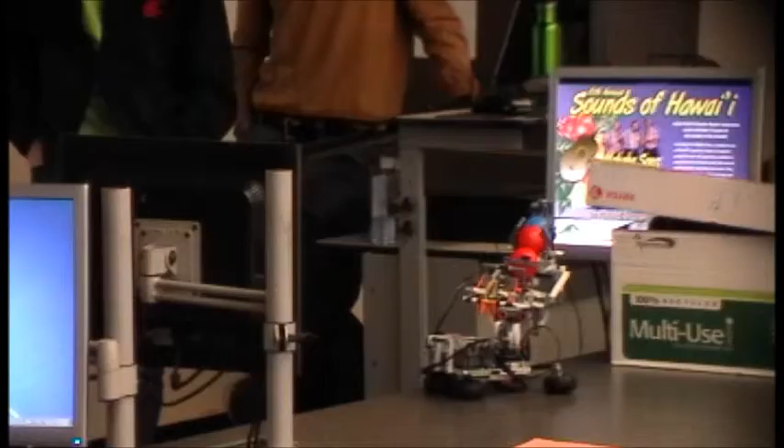Our general design for the barrel includes a seat for the ball, which pulls back, connected to two rubber bands. We also have two sets of railings, one motor that pulls back the seat, and a touch sensor—when the seat gets pushed back, the ball falls into it and it shoots.

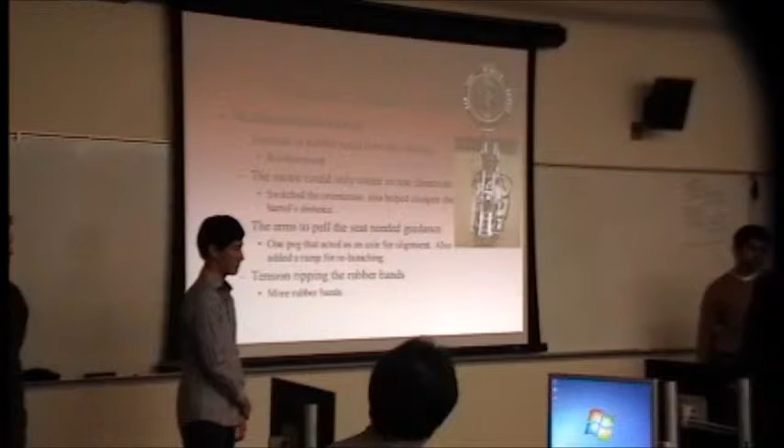When the rubber band was getting pulled back, it was bending these parts, so we reinforced them with extra rails on the side. We also flipped the motor around so we could have a longer barrel for longer shooting distance. So the arm can get guidance, we added one small peg attached to the side so they wouldn't go anywhere.

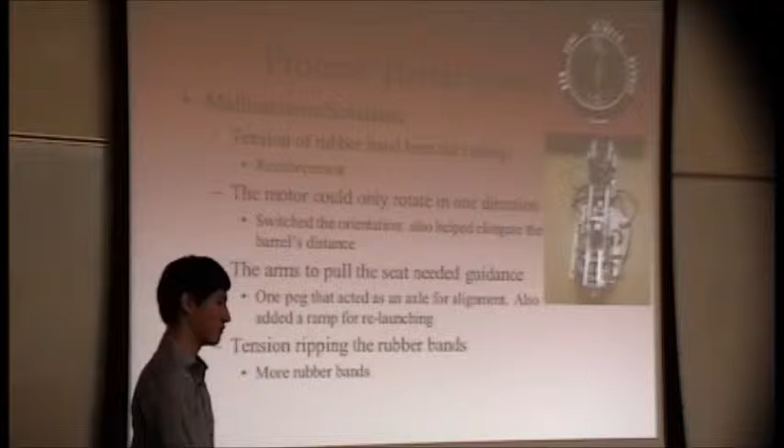We then added more rubber bands to stabilize it. We had difficulty integrating the reloading chamber here on the side, or rather on the top.

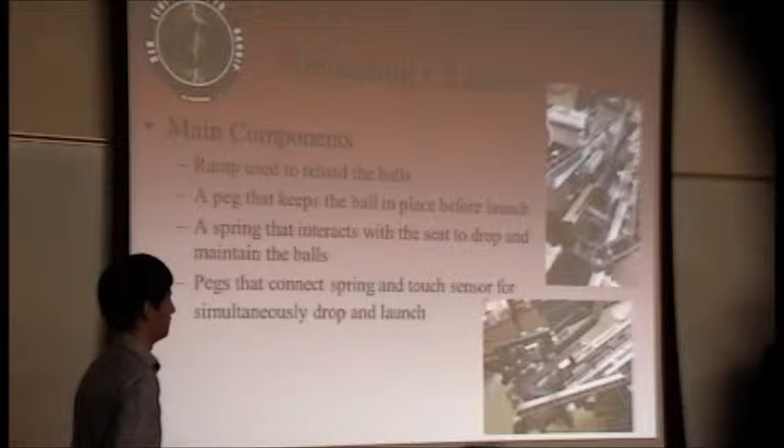What we came up with was a ramp system here that gravity-feeds the balls in. There's also a peg back here that keeps the ball from coming back, because when this rail comes back it actually pushes the ball up, causing a problem where it would push it back and wouldn't fall into place.

There's actually a spring in here. As this sled comes back, it comes in contact with this spring, and it pushes back and lets the ball drop into place, then pushes forward again to keep another ball from falling in. There's a picture on the slide, right here.

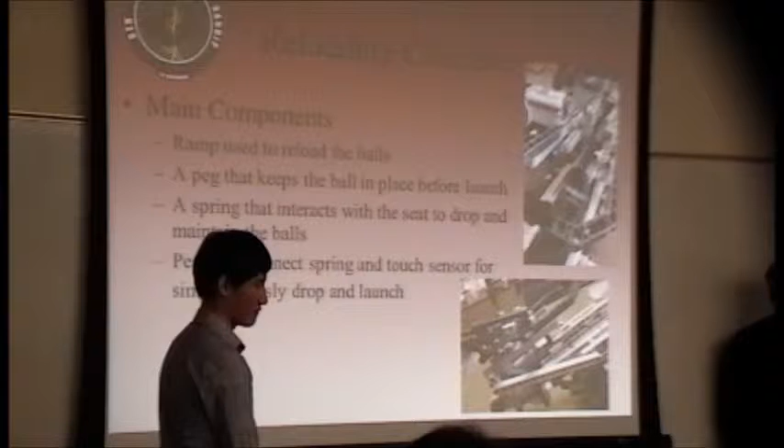We added this because it would sway back and forth. Every time it would come back in contact with the spring, we added a peg connected to the touch sensor to keep it all in line.

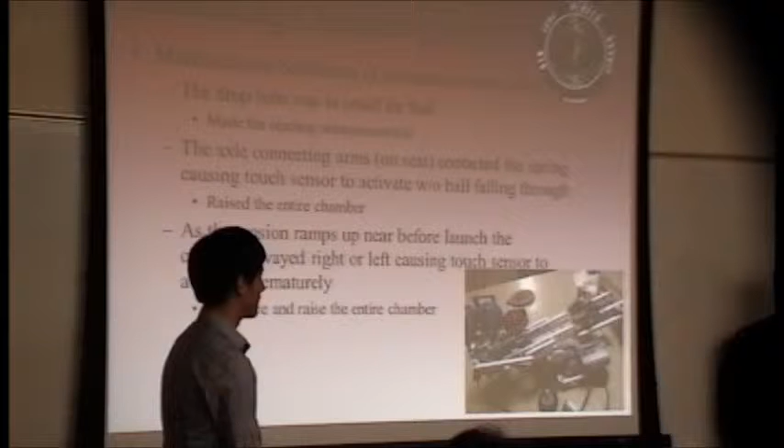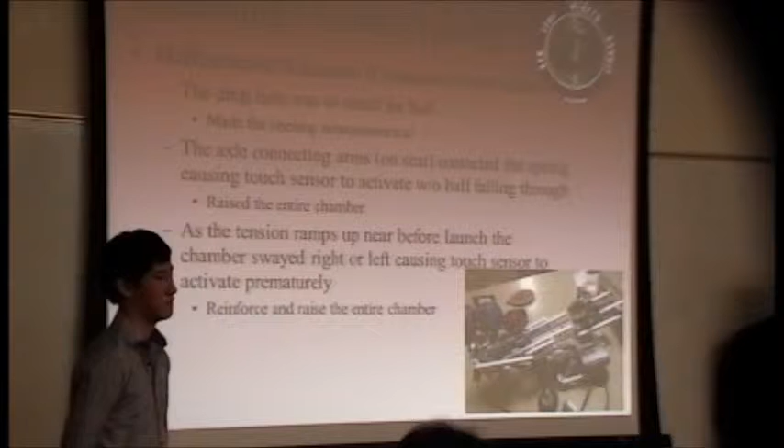Some of the malfunctions we had: sometimes the ball would either not fall in or it was too tight up here. One of the struggles early on was that it wouldn't fall in, but as the motor kept pulling it back, it would finally release and either fall off to the side or shoot incorrectly.

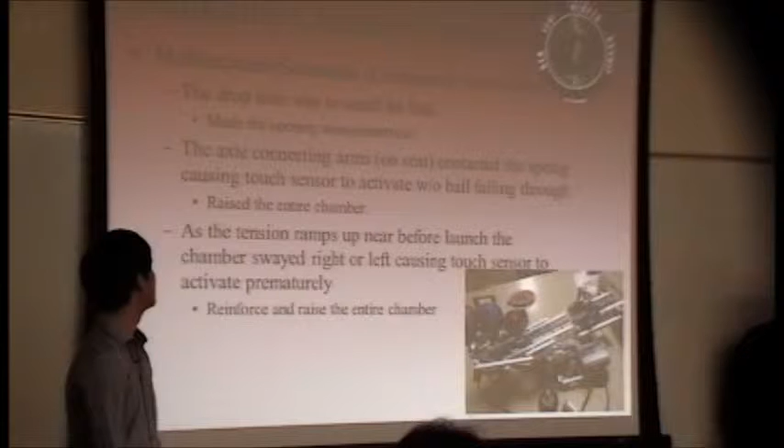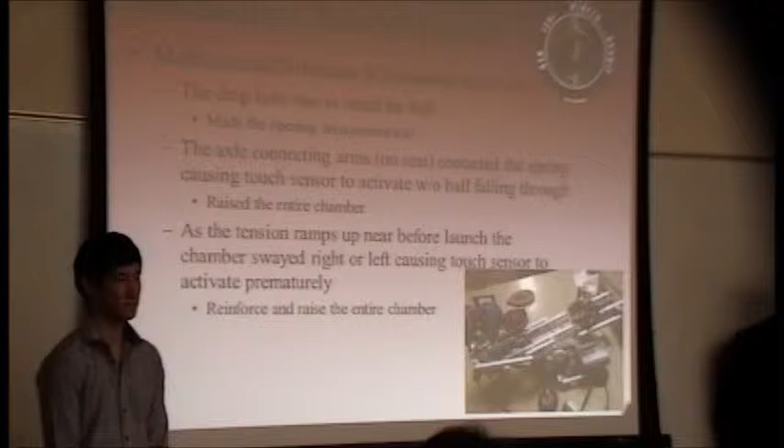Another issue was that sometimes it would shoot prematurely, with the axle continuing to go back without touching the touch sensor to stop it, which would tear this whole thing off.

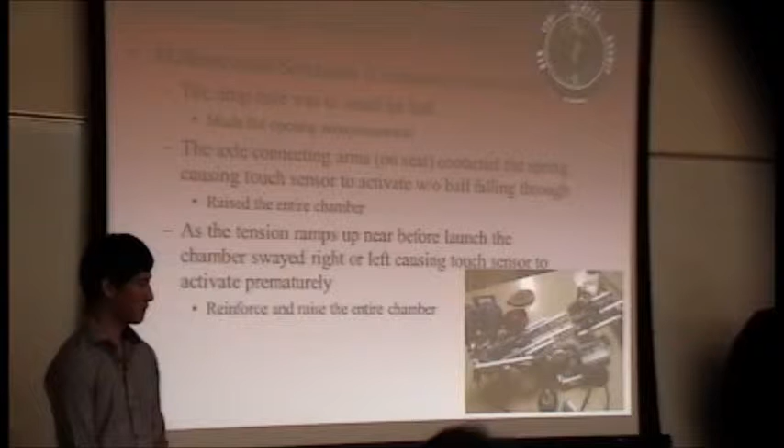Like I said before, this would sway back inside, so we added these long arms to keep it in line. That way it wasn't coming off track and everything stayed straight so it could feed properly.

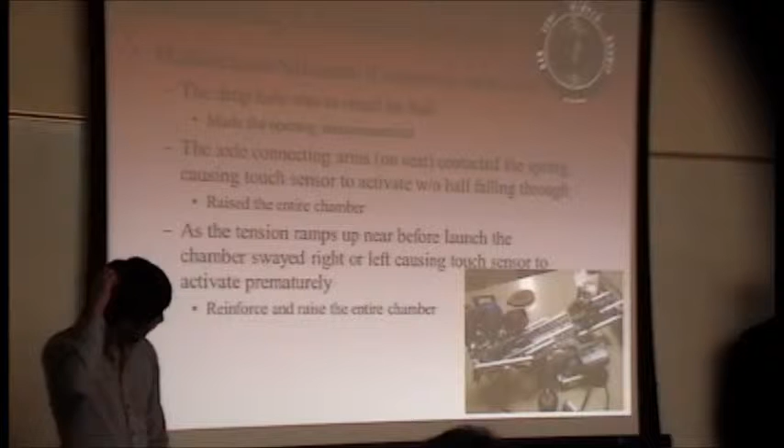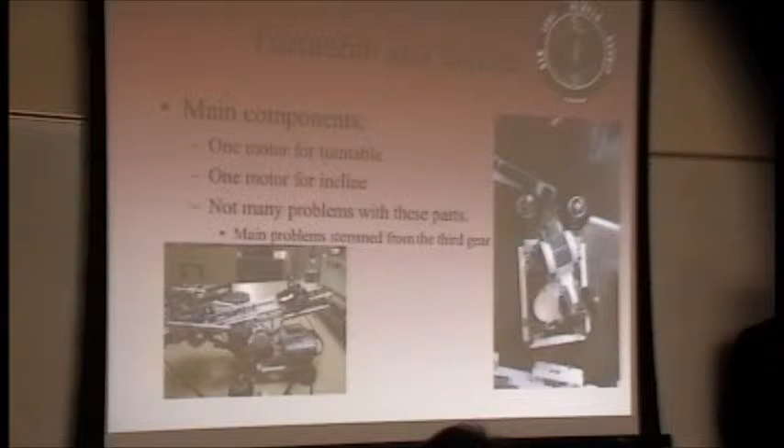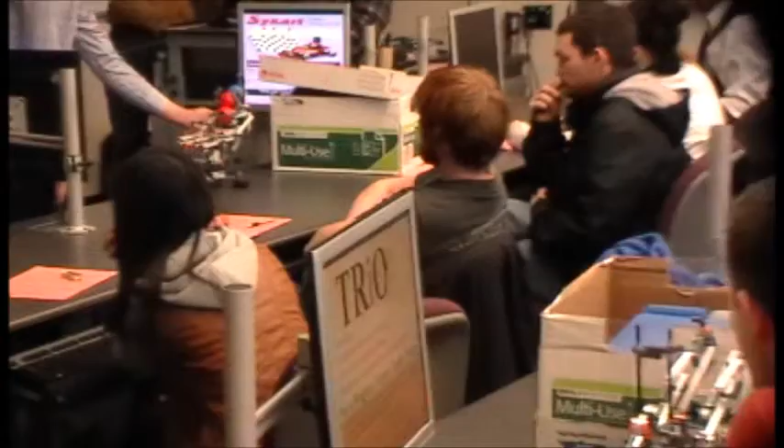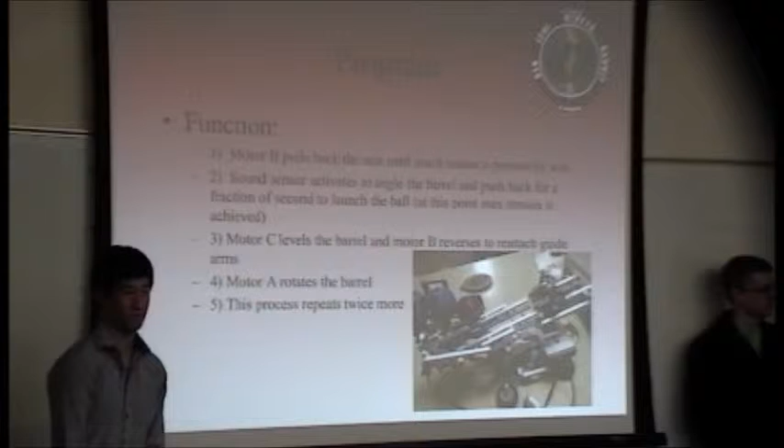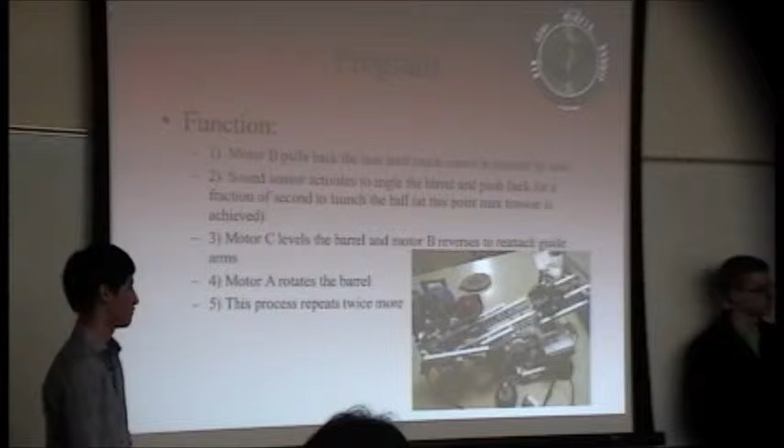Our program is pretty basic. We used a touch sensor and a sound sensor. It starts with motor B, the one in the very back connected to the two strings. That pulls back the seat, which keeps going back until it comes in contact with the peg connected to the touch sensor. Once that activates, it stops. The program waits for us to make a sound, then it goes back for a fraction of a second.

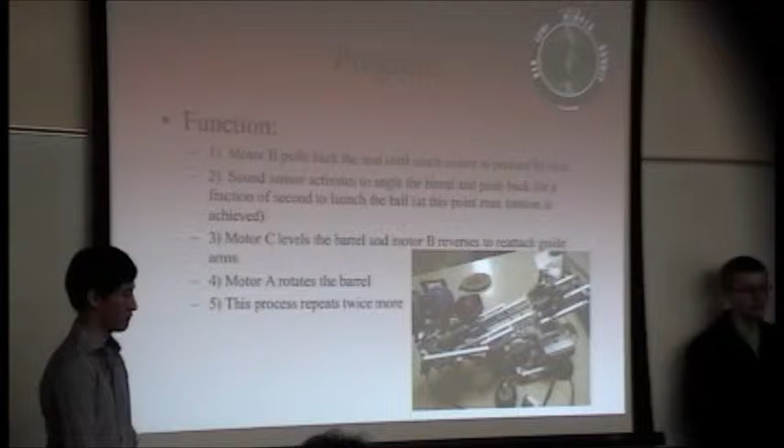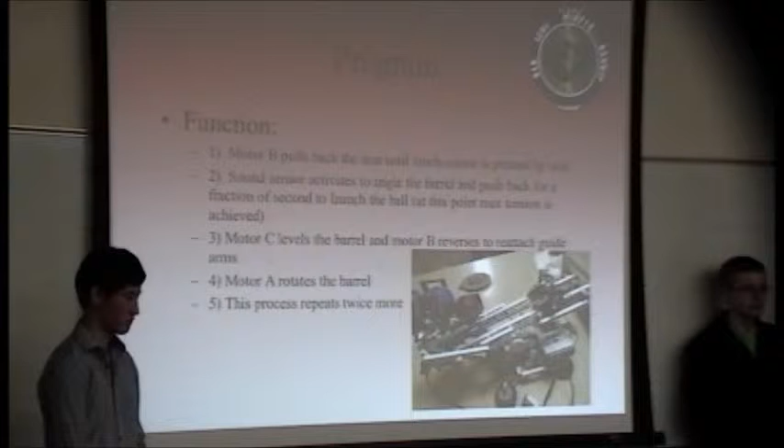So now it's up against the wall, and the two side arms right here will just pop off, releasing with the force of the rubber bands. Once that happens, it levels again. That's motor C, and it'll rotate using the right bottom motor, kind of hard to see, and that repeats twice more.

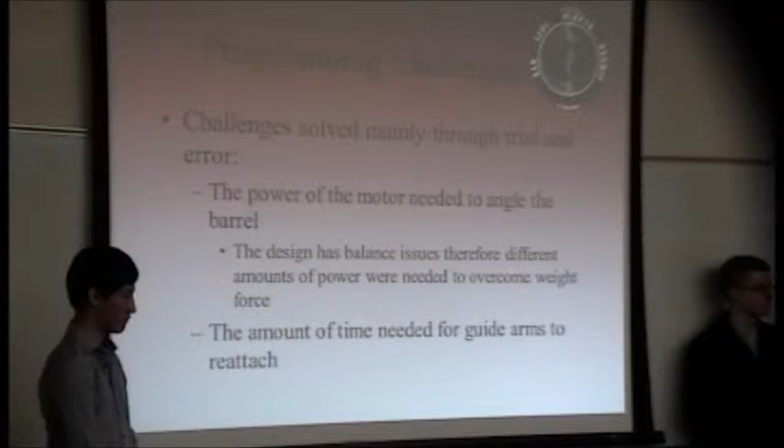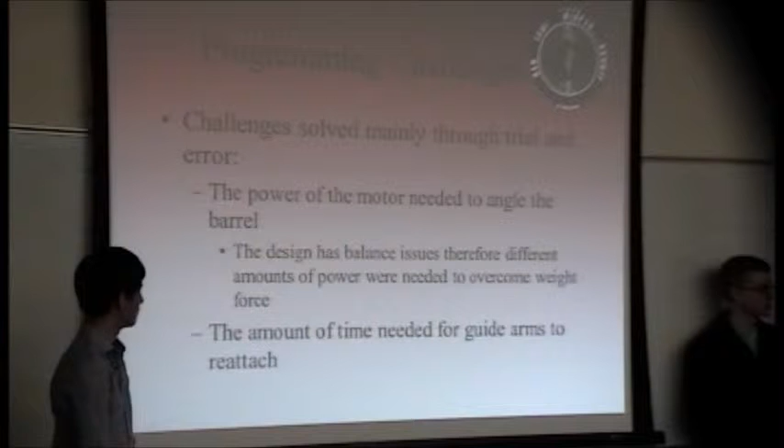Some programming challenges, really not too many. We only used two main sensors, so not that many problems. We had to readjust the power sometimes, because when it inclines and levels, it gets screwed up and we have to fix that. Also, when it rotates, we have to adjust the power on that, since sometimes it would only turn a few degrees.

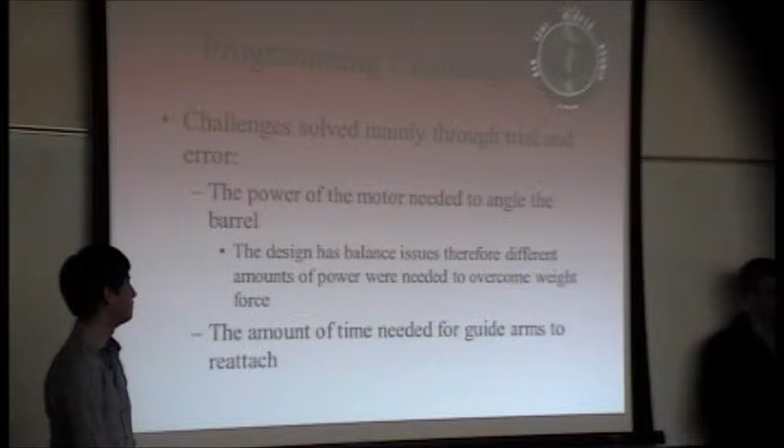Also, when the two guide arms come off, we needed the right amount of time to actually bring them back so it could relaunch. This is like a ramp, so they slide up and pop back in. Right now it's at about 15 seconds.

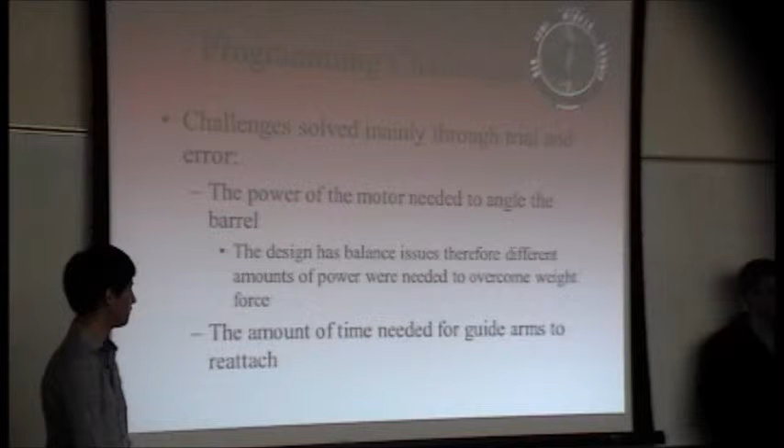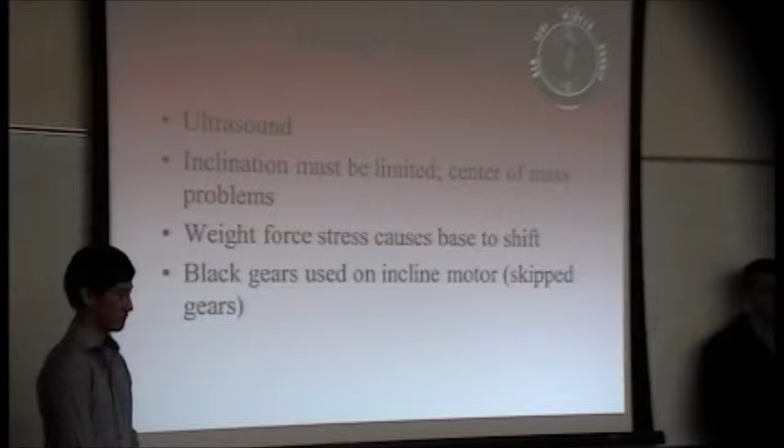Some of the design flaws we had: we initially wanted to use the ultrasound sensor down here to determine how far a target was, and have it rotate to compensate for firing distance. But unfortunately we never got that far, so we just left it there because it looked cool.

The inclination here actually needed to be limited because we were trying to find a good center of mass. This barrel up here is really heavy, and you can see it putting a little tension on the back turntable. So we had to play with where it actually attached to these gears. When it would incline too fast or too slow, sometimes it wouldn't even go, or it would flop backwards and not be able to raise itself up.

The weight and weight distribution also made it hard to rotate, because it was putting all this tension back here, which put an offset on this side, whereas over here it was more level.

Originally we had those big black gears on the actual inclination motor, but those black gears don't mesh very well, so because of all the weight distribution it would skip gears. We went with deeper toothed gears, the gray ones, which functioned a lot better and gave us a lot more stability.

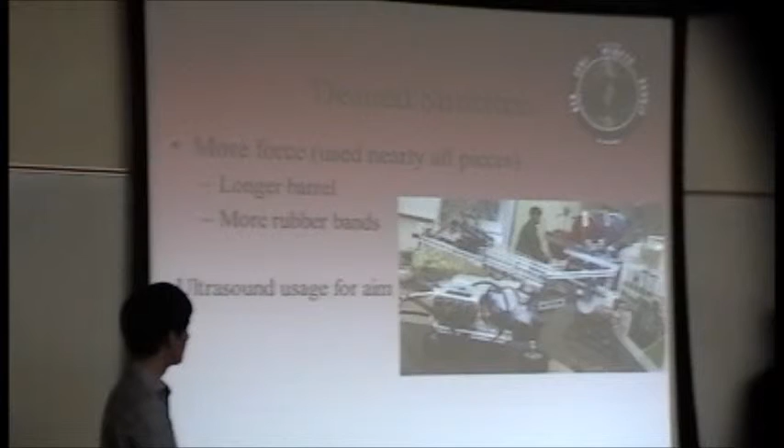We got it working for the most part. It's working pretty nicely, but for our design, if we had more time and more pieces, we'd want to make a longer barrel. We also could have added more rubber bands for more force, but we just didn't have enough time for it.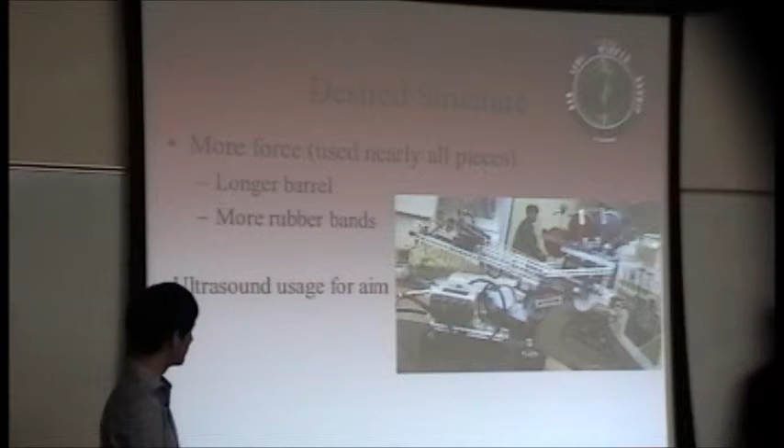There's an ultrasound sensor connected to it - maybe you're wondering about that. It has no use at all. We had it there before; we were planning on using it but never got to it.

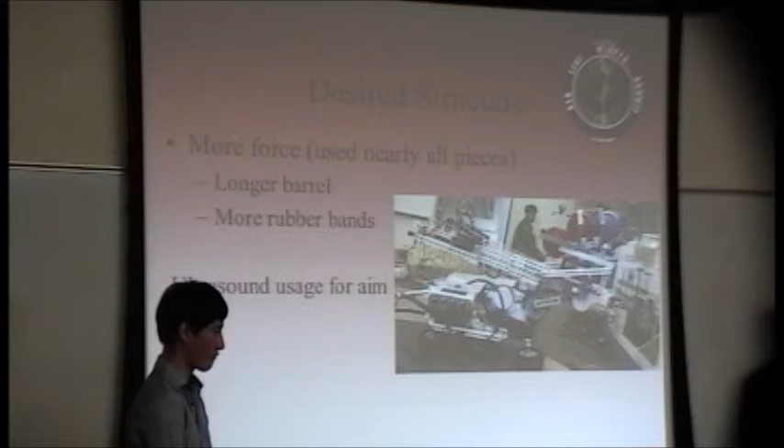We used nearly all our pieces, so that was a problem. You guys know this because we took a lot of your parts.

Yeah, that's it. Okay. Yep.